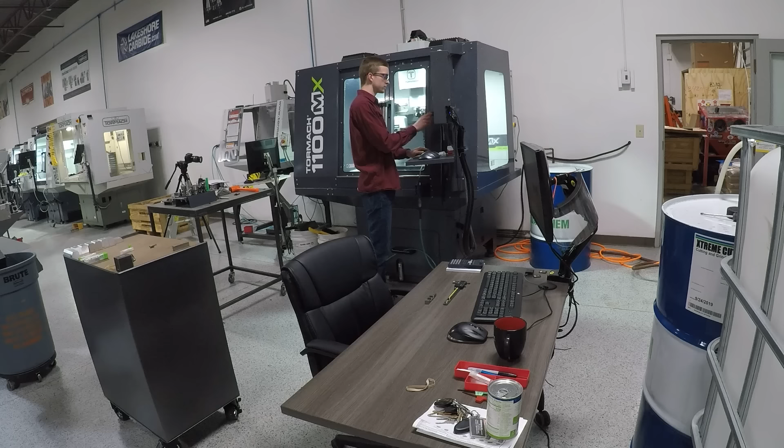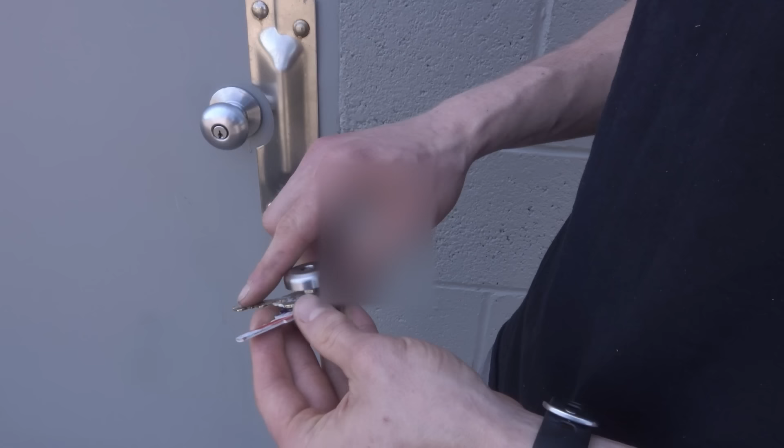My primary focus is developing cutting recipes for ProvenCut. We wanted to conduct some tests surfacing titanium on a Tormach 1100MX. We decided to design and make a titanium KeyBar, and we're here today to talk through some of the programming strategies and tools that we use.

For Op 1 of this part, we are going to use a Saunders Machine Works mod vise and a total of 4 Mighty Bite Talon grips.

So here we are with a model of the KeyBar. I'm going to walk through some of the programming and some of my logic behind my strategies.

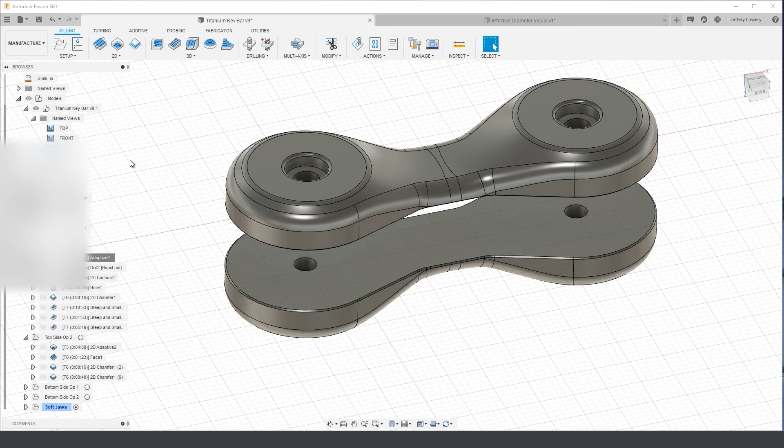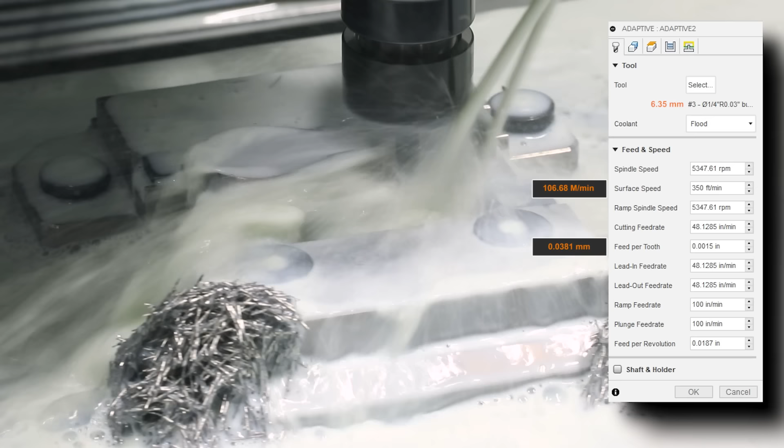We start out with a 1/4 inch tool conducting an adaptive strategy to clear most of the material. We're going to run it at 350 surface feet per minute, 1.5 thou feed per tooth, and an optimal load of just 20 thou. 20 thou is 8% of the tool diameter, which is less than what we would use with other common materials.

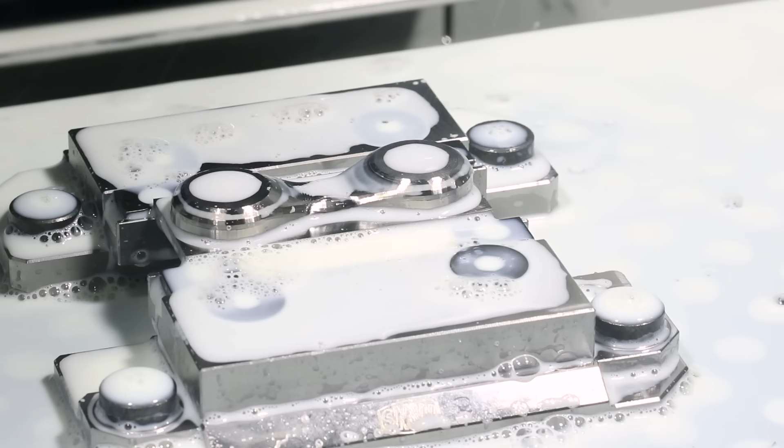The reason we do this is because titanium is a very heat resistant material, meaning that during a cut, the material is not going to absorb much heat. It's going to push a lot of that heat back into the cutter. Having a lighter radial load will enable the cutter to spend more time in the coolant and in the air, less time in the actual cut building heat per revolution.

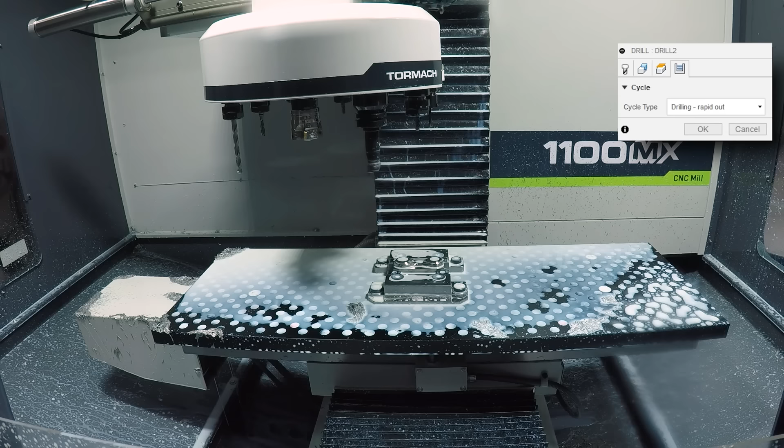So now we move on to the drilling operation. We're using a number 4 carbide drill, running it at 100 surface feet per minute and feeding it at 2 thou per rev. We decided to use a drilling operation and plunge all the way through the material.

So the upside of this is that there are less times that the drill is entering the cut. The majority of the wear on a drill bit happens while the drill is actually entering into the material. So we go all the way through, we're only entering once.

The downside of this that we really have to be careful of is chip removal and overall heat buildup. For this application, drilling all the way through worked great.

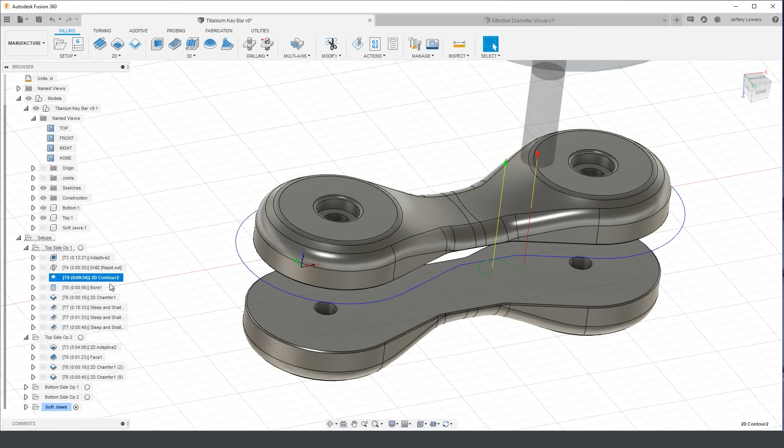So after the drilling operation, we move on to a 2D contour to finish the vertical walls of our part, a boring cycle to clear the bores for the counter bores on the bolts, a chamfer, and from there it is time to tackle the 3D surfacing of this part.

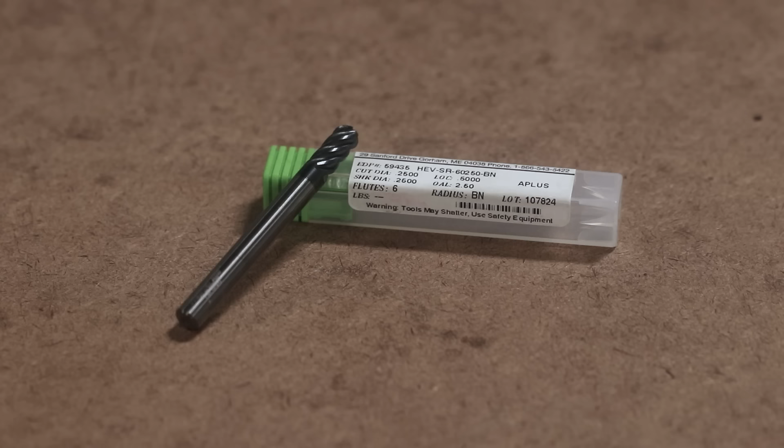We decided to use a 1/4 inch ball nose end mill. This is a helical tool. It has 6 flutes and it is coated with Helical's A+ coating.

The higher flute count is going to make the tool more rigid in the cut, and it is going to enable us to achieve a higher feed rate while still maintaining a low feed per tooth. Helical's A+ coating allows for high temperature resistance, decreased wear, and improved tool life. This is really important when working with a tough material like titanium.

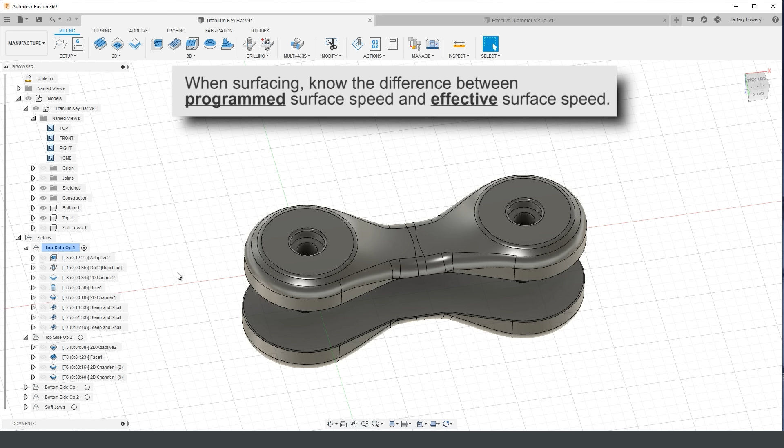An important point to understand when you're 3D surfacing any material is the difference between your programmed surface speed compared to your actual or effective surface speed. Here we have the shape of a 1/4 inch ball nose end mill modeled that really shows what we're talking about. When Fusion 360 calculates your surface speed of a cut, it is using the largest diameter of your tool. But if you're cutting an angle with a ball nose end mill, your actual surface speed at the contact point is going to be less than the largest diameter on your tool.

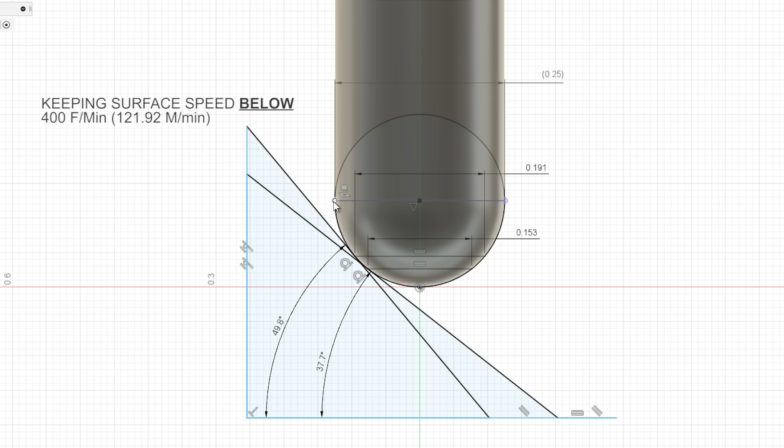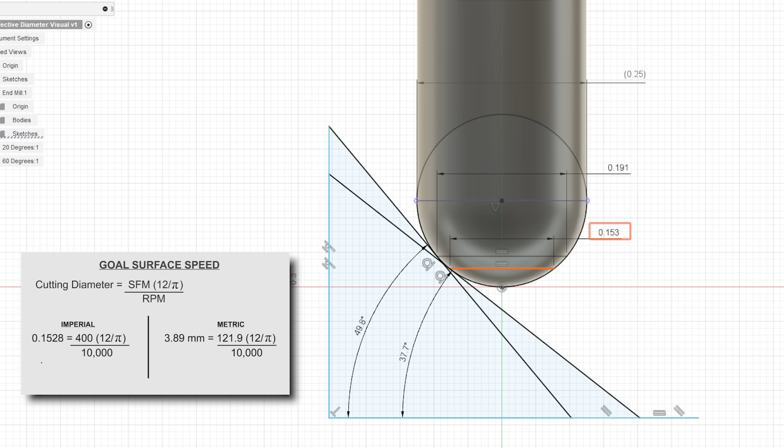So for this part, I wanted to keep the surface speed below 400 surface feet per minute. The machine we're working with, the Tormach 1100MX, has a maximum RPM of 10,000. If we maximize that RPM, we reach a surface speed of 400 SFM at 0.153 inches. So we're able to sketch a few lines, use a few constraints, and find that an angle of 37.7 degrees will give us an effective surface speed of 400 SFM.

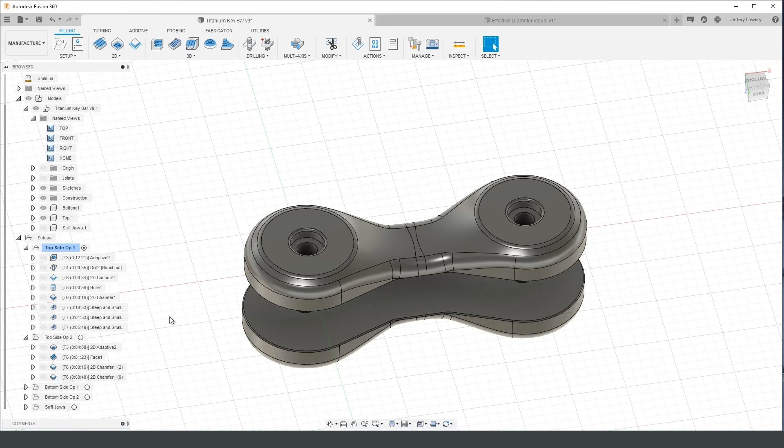So the question is how do we apply that to our programming? I broke this part into 3 different steep and shallow units. The first one, I maximized the RPM of the spindle, 10,000.

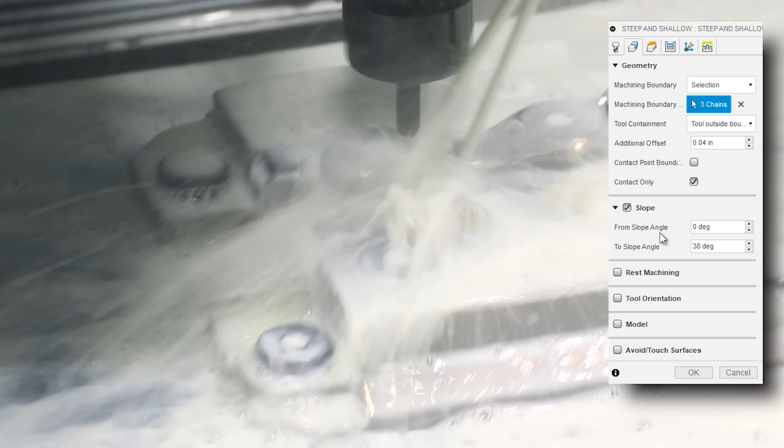From there, we jump over to the geometry tab, we select the box for slope, and it gives us the option to machine a range of angles of the part. So in order to keep the tool below 400 SFM, I didn't want to go above an angle of 38 degrees.

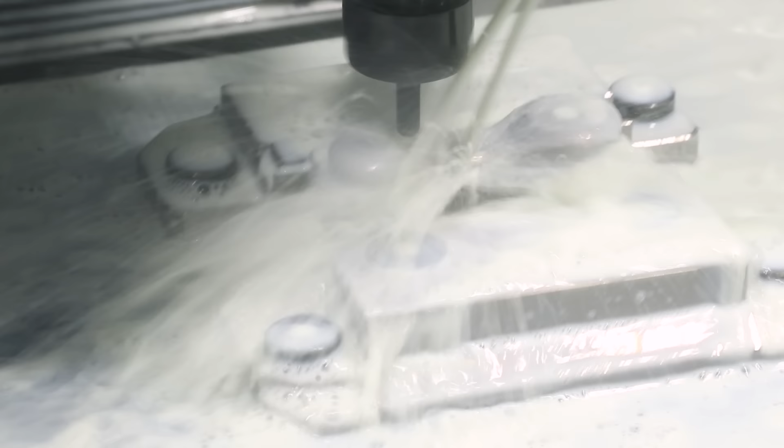So for this first unit, we're machining between 0 and 38 degrees, staying towards the bottom side of the end mill and keeping our surface speed below 400 SFM. For our next unit, I decided to program at 8,000 RPM. So the question becomes, what diameter at 8,000 RPM will give us 400 SFM? We calculated that a diameter of 0.191 inches will give us 400 SFM.

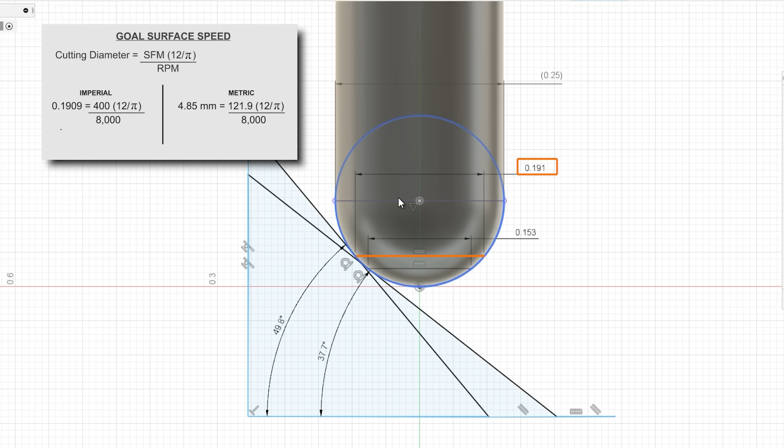So a few more lines, a few more constraints, and we see that 49.8 degrees of cut will contact the point on the end mill. That gives us 400 SFM.

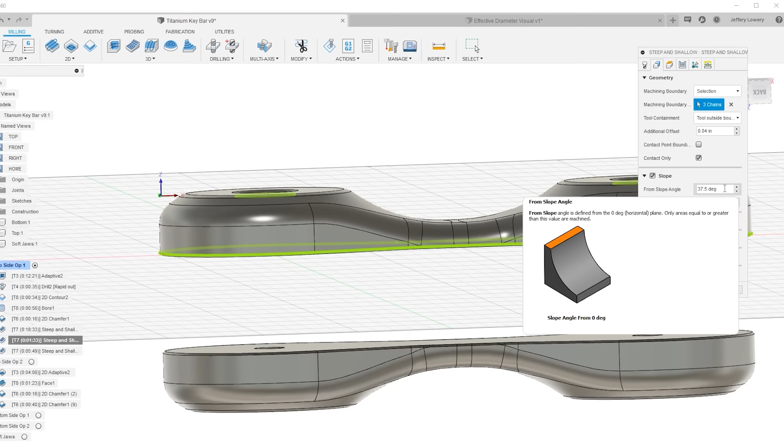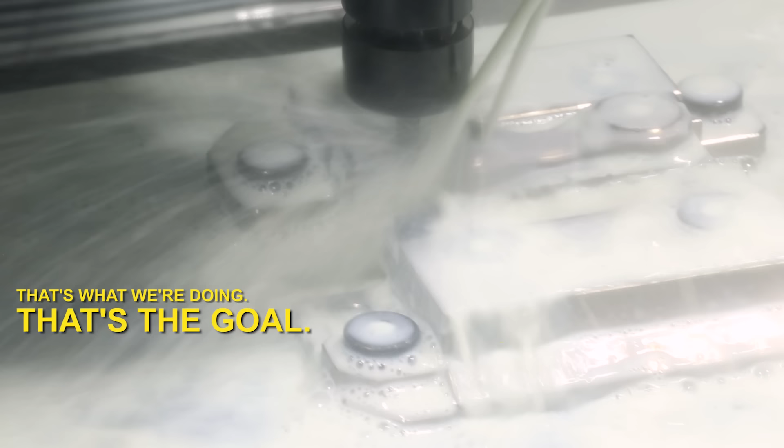So we jump over here to our second steep and shallow unit, geometry tab. Our slope ranges from 37.5 up to 50 degrees. I rounded a little bit on these numbers and have just a little bit of overlap between my steep and shallow units, just to make sure the entire part cleans up. But that's the goal, to keep our end mill below 400 SFM.

Then for our third steep and shallow unit, we programmed that to a true surface speed of 400 SFM. That comes out to 6,111 RPM, and we're going to cover the range of 49.5 up to 90 degrees. This is going to cover the rest of our part and will be much larger on the actual diameter of the tool.

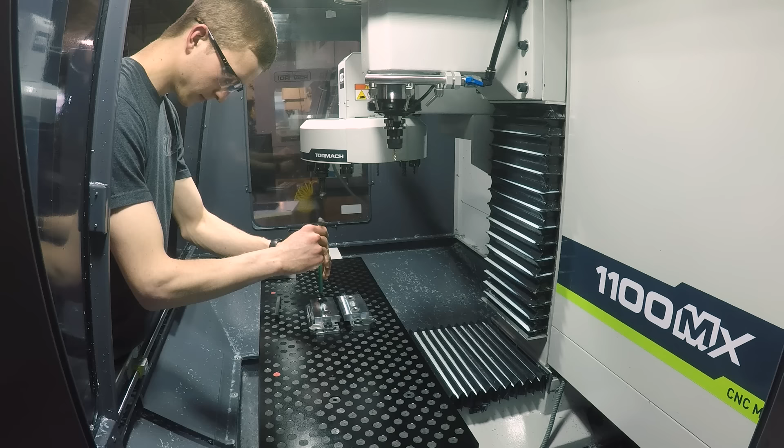So now, in order to hold the part for the second operation, we are going to dive into some soft jaws. We are going to use an adaptive strategy to clear the area, follow that with a 2D pocket to finish the floor, a 2D contour to finish the walls on our soft jaws, and then follow that with a small 2D chamfer just to knock the edge off.

And now we're ready for the second operation of this part. So we get over here to the back side, and it's going to be simpler than the front. We start out with an adaptive strategy to clear the top hat off of the part, and we follow that with a facing operation.

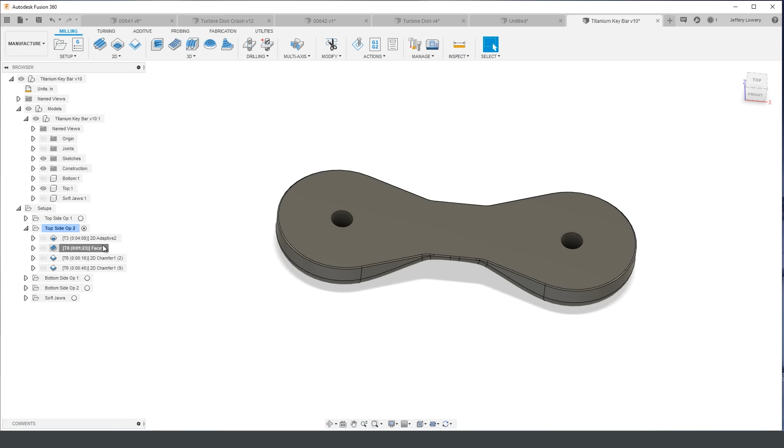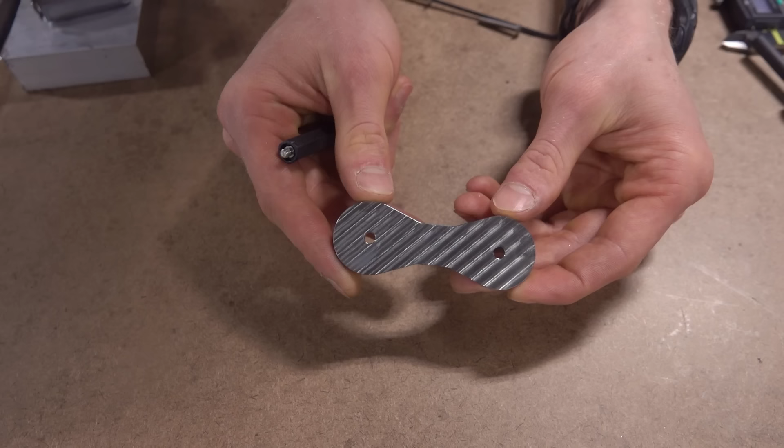On this facing operation, we set the pass direction to 45 degrees, and the end mill will move across the part at 45 degrees to the x-axis and leave a really cool surface finish. So we chamfer the holes just enough to knock the edge off, and then we come in for our final outside profile chamfer.

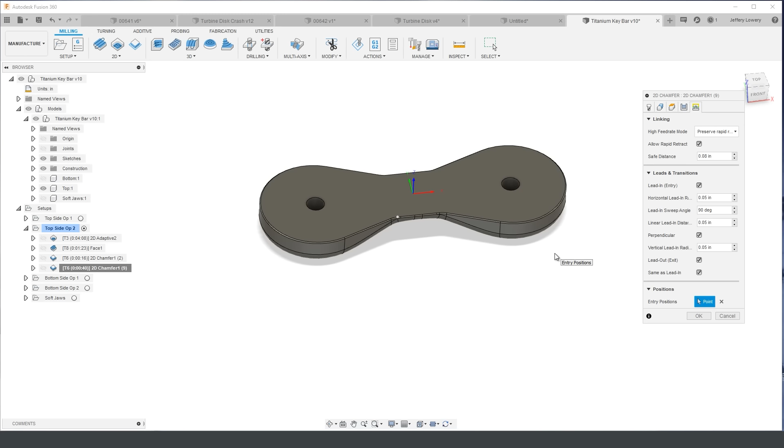One last programming tip is to select an entry point that will blend the entry mark. What I mean by this is, even if it's just a small chamfer, the machine will leave some imperfection where it enters the cut. So for an entry position, if you select the beginning or even the end of a radius, you are much less likely to notice that entry mark.

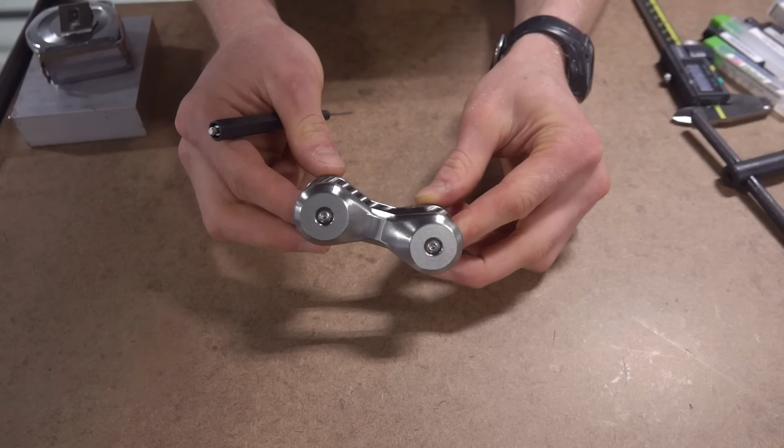So folks, these parts were a lot of fun to make. Getting to see the machine move all three axes simultaneously like that is really fun to watch, and these machines will make beautiful parts. Overall, these parts turned out really well.

But if I had to do it all over again, I wouldn't break it into 3 different steep and shallow operations. Overall, it made the part faster to make, but you can see some of the transition lines here between the different operations. I was talking with John about this, and he explained that that's actually a huge advantage of steep and shallow, being able to cover many different characteristics of your part with one operation and avoid some of those transition lines.

Folks, I thought Jeffrey did an absolutely awesome job on that project. The goal was to develop some titanium recipes and some surfacing recipes for ProvenCut, but to do so in a manner of a practical product.